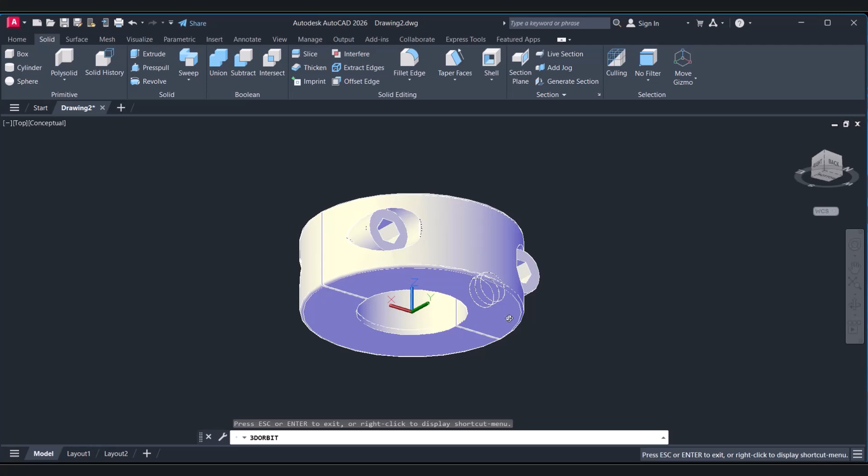In this video, you'll learn how to design a double split shaft clamp in AutoCAD, which consists of 4 components.

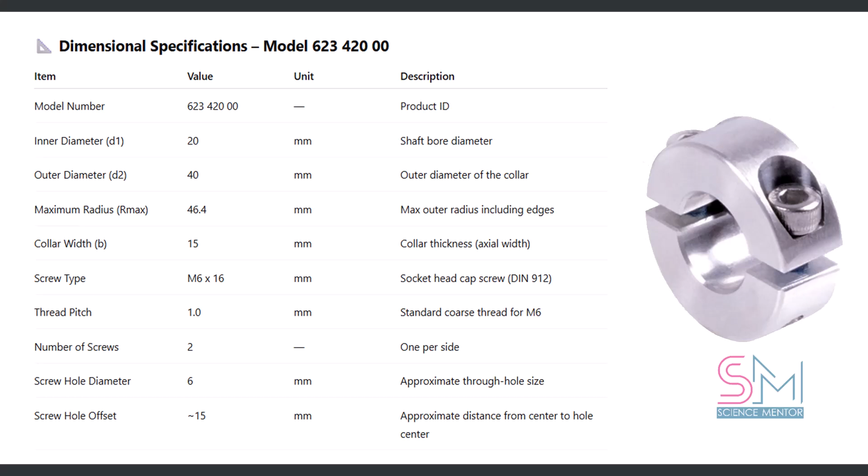Hi again, I'm Milad, and I'm back with another AutoCAD 2026 tutorial. In this video, I'm going to teach you how to model a double split shaft clamp with the specifications shown here. This clamp consists of 4 separate parts.

As always, I start by setting the units using the unit command, since I'm going to work in millimeter dimensions. Using the circle command, I draw 3 circles: the first with a radius of 10 mm, the second with a radius of 20 mm, and the third, just a construction guide, with a radius of 23.2 mm.

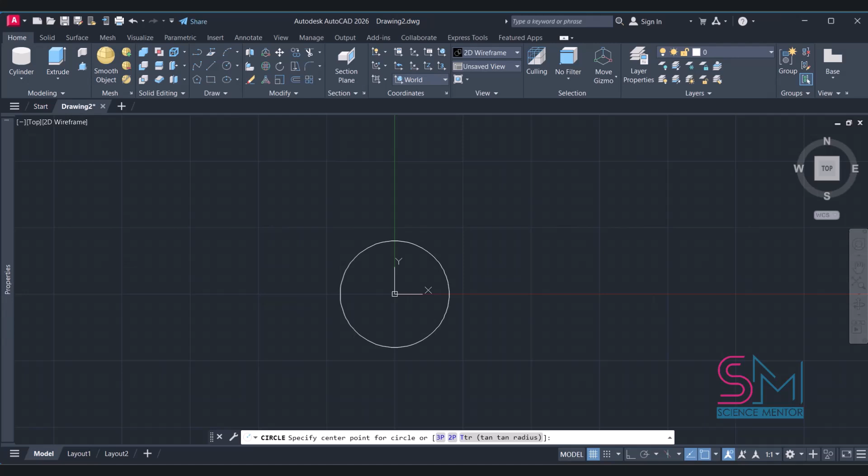The clamp I'm designing is a double split clamp collar, used to hold, position, or secure components on shafts. It's made of 2 halves and tightens around the shaft evenly when screws are applied without causing any damage.

Next, I use the extrude command to extend the circles to a length of 15 mm to form a 3D volume. To subtract the smaller circle from the larger one, I use the subtract command.

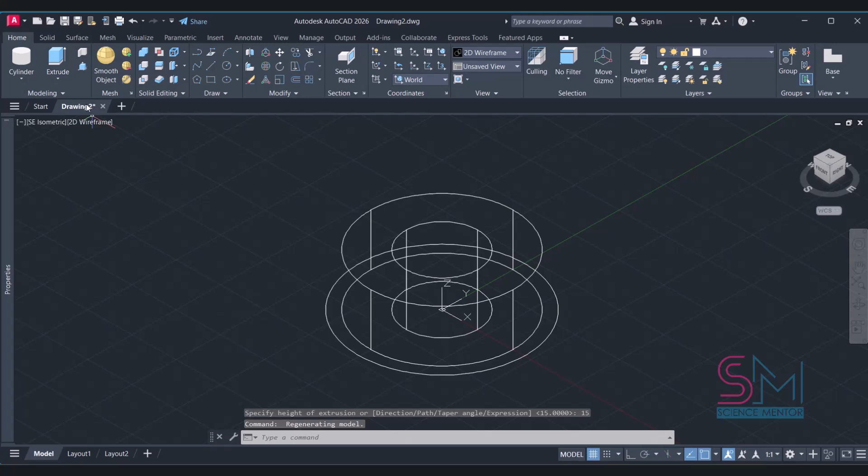Then, I draw a construction line to mark the centre of the screw hole. This line is at a height of 7.5 mm from the base, right at the centre, and located 15 mm from the clamp's centre.

Now it's time to design the screws. First, using the circle command, I draw a circle with a radius of 3 mm and extrude it 21 mm to create a cylinder.

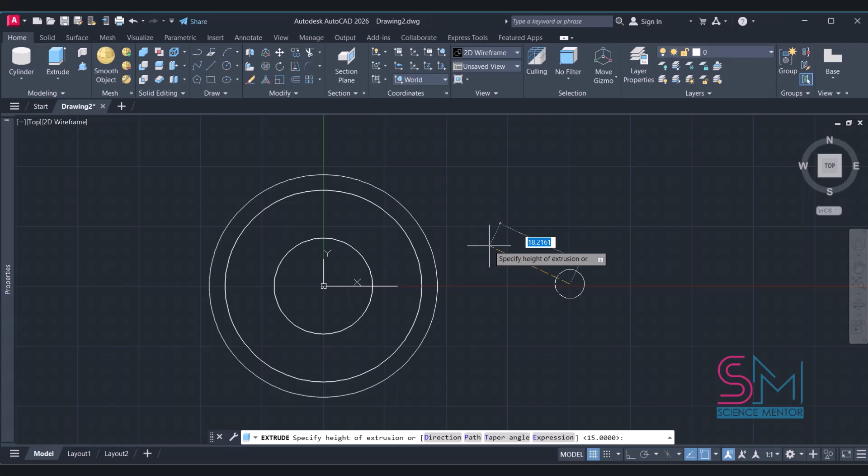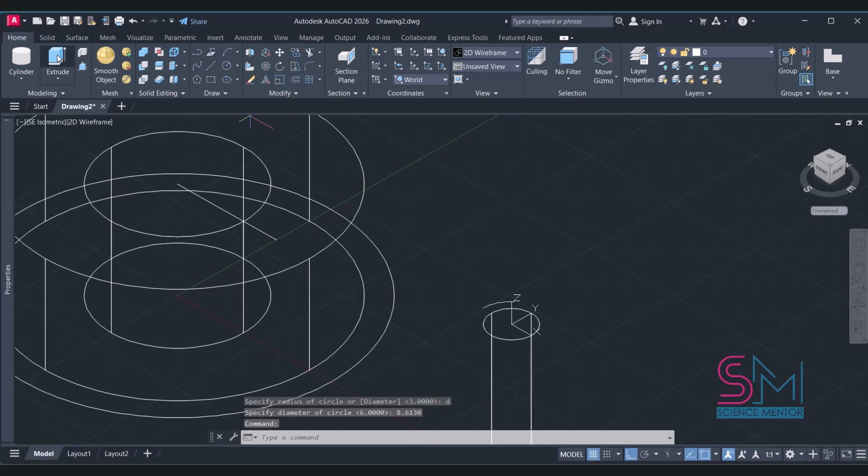I repeat the process for the screw head, but this time the diameter is around 8.613 mm. I extrude this part to a height of 11.9011 mm.

I changed the visual style to conceptual so the view becomes clearer.

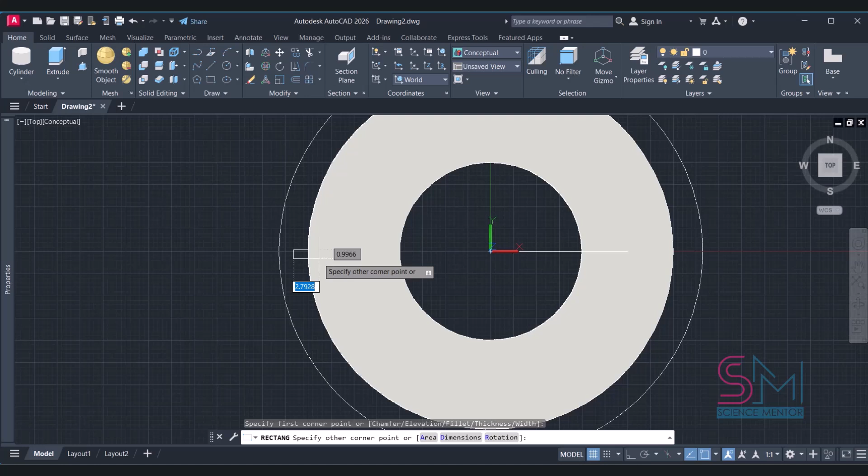Then, using the rectang command, I create a rectangle that's 0.5 mm thick and wider than the clamp diameter. I extrude this rectangle beyond the shaft's height. Using subtract, I can now split the shaft into 2 separate pieces.

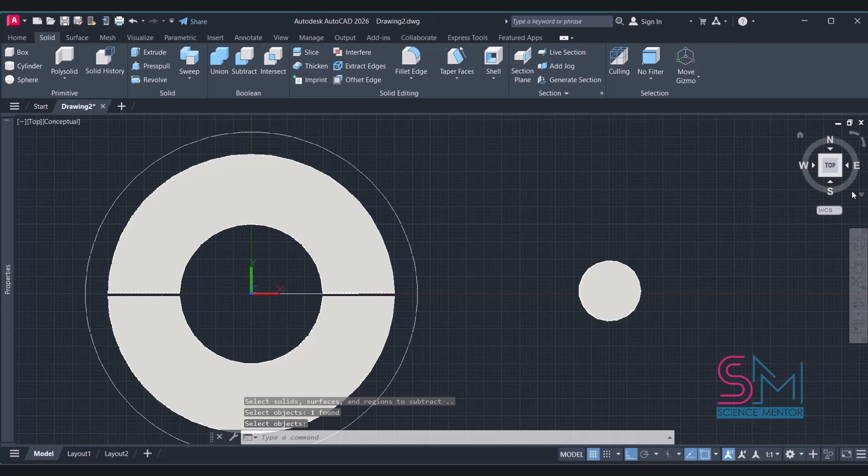I switch the view back to 2D so I can see the details more precisely. Next, I start drawing the thread around the screw using the helix command. This helix has a radius of 3 mm and a pitch of 1 mm.

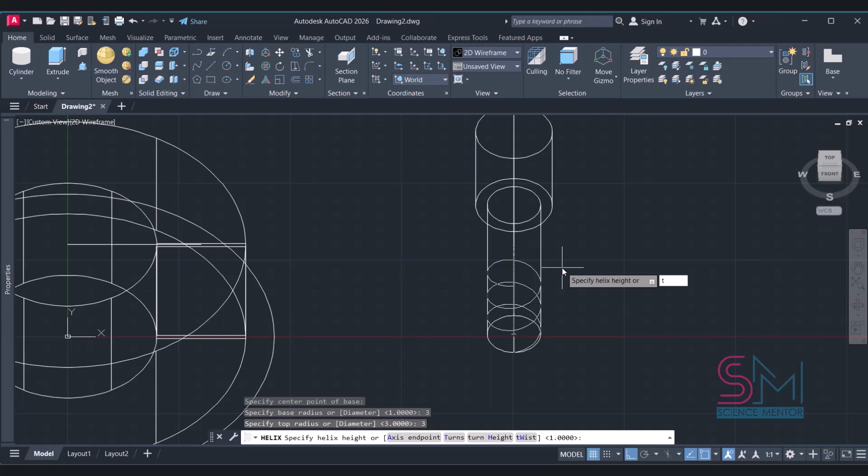The helix command in AutoCAD is used to draw 3D spiral curves like threads or springs. You can adjust base diameter, top diameter, pitch, and height with it.

Now I need to create the profile of the thread. I use the circle command to draw a small circle with a radius of 0.25 mm.

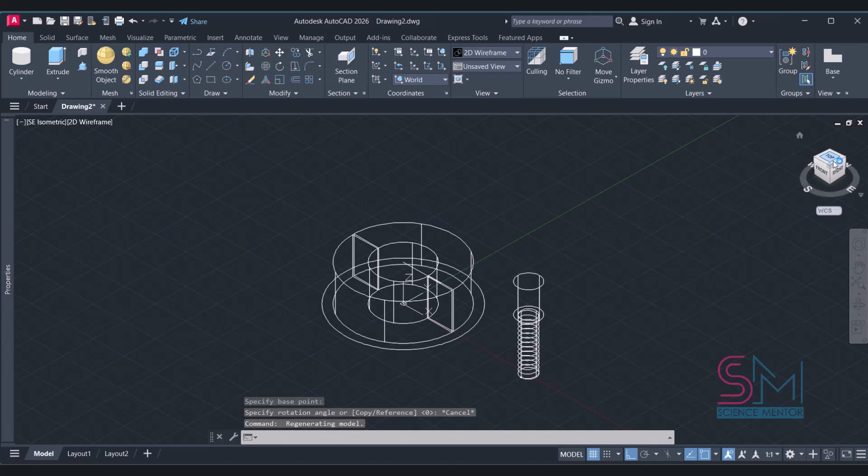This circle needs to be perpendicular to the thread path, which I do using the 3D-rotate command.

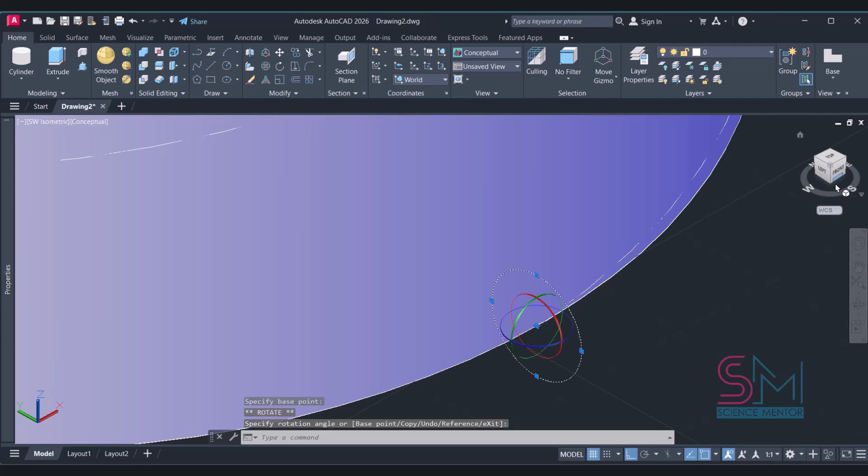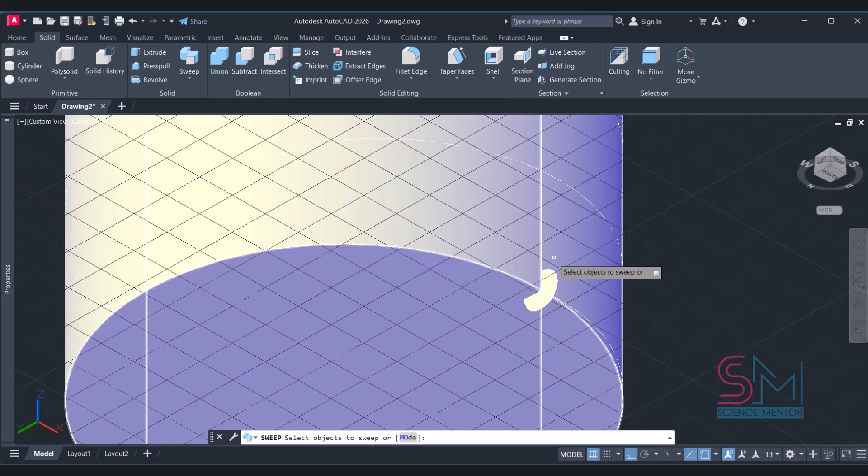I convert the circle into a region using the region command. This command is used to turn closed 2D shapes like polygons or circles into regions that can be calculated and used for 3D operations. Using the sweep command, I extend the drawn circle along the helical path to create the thread.

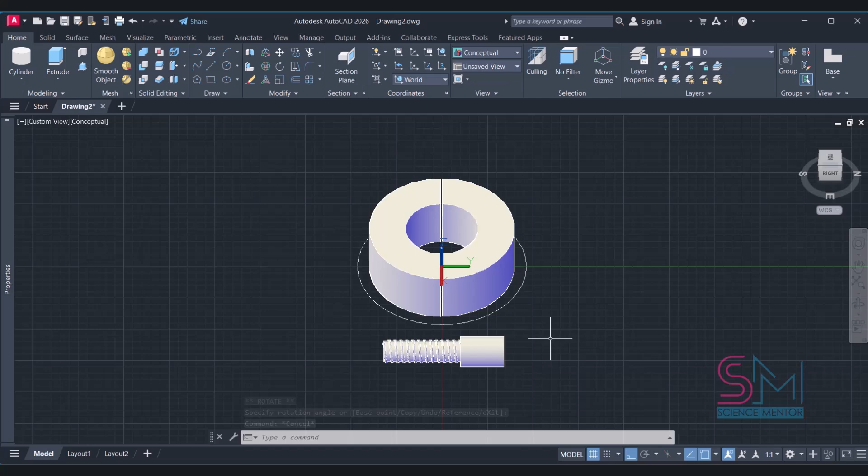Then, I rotate the screw to align it with the clamp. I make a copy of the screw to use as the main one later.

I drag and move the screw into its correct position on the clamp using the Move command.

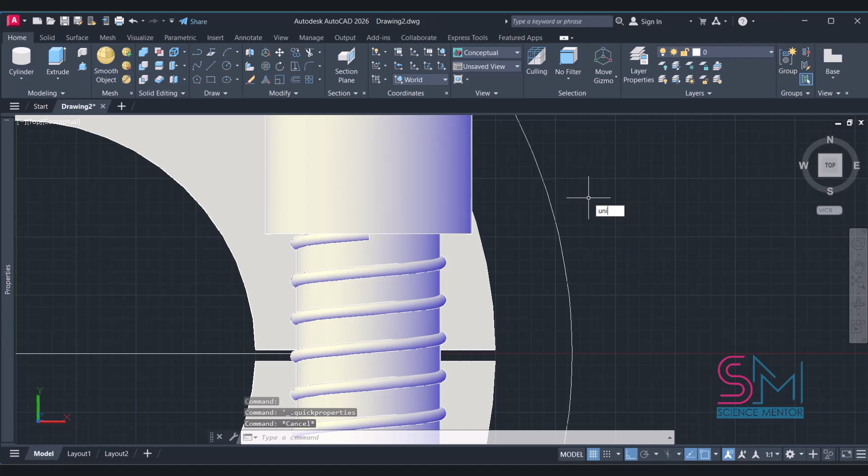Make sure to check the alignment from different angles to get it right. Socket head cap screws have cylindrical heads with internal hex sockets that are tightened using an Allen wrench. These are commonly used in tight spaces and precision applications like assembling mechanical parts and machinery.

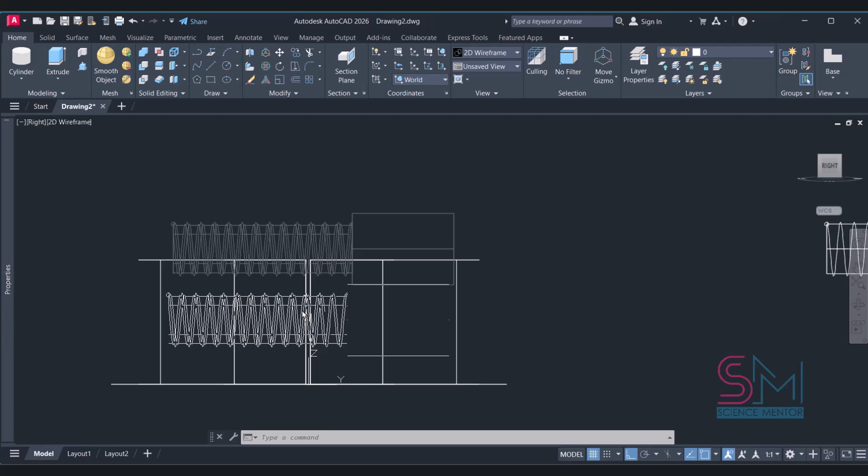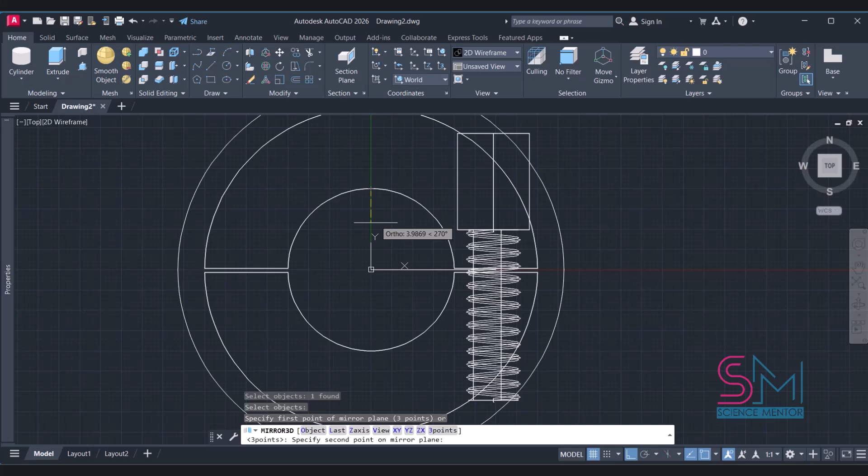To create a mirrored copy of the screw on the other side of the clamp, I use the Mirror 3D command. I select 3 points on the center plane so the screw is mirrored accurately.

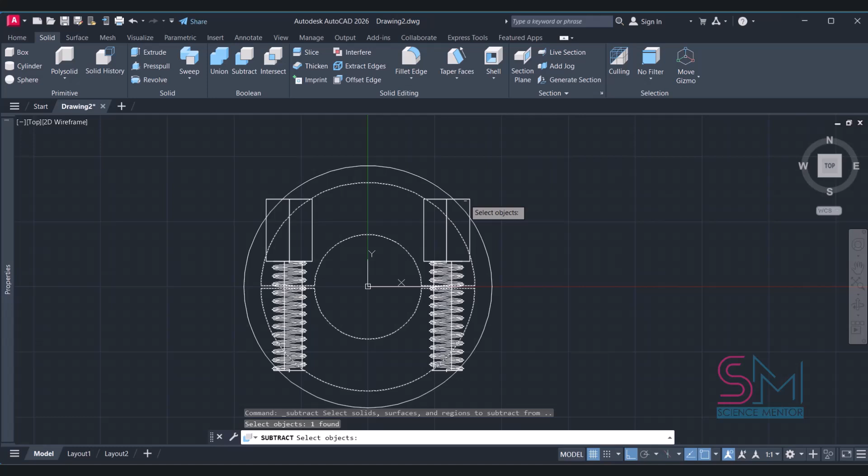Using Subtract, I remove the volume of both screws from the clamp to create the holes and threads. You can view the result from different angles.

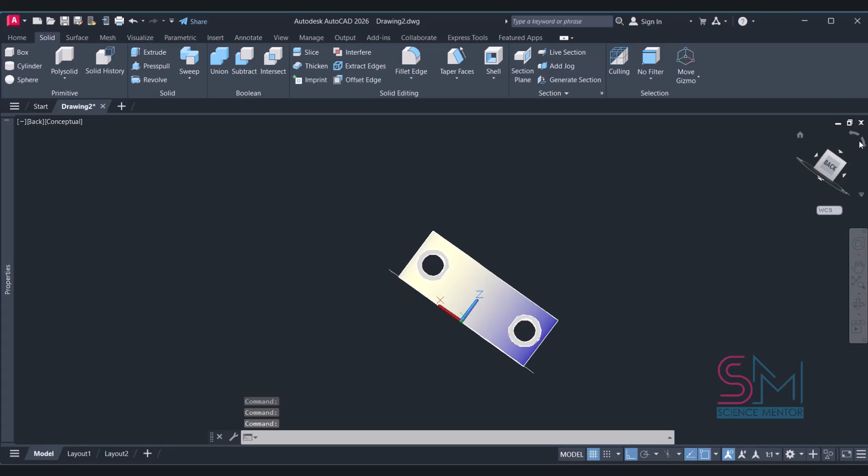Now, back to the screw for some fine-tuning. First, I subtract the helix from the screw body using Subtract to cut the thread into it.

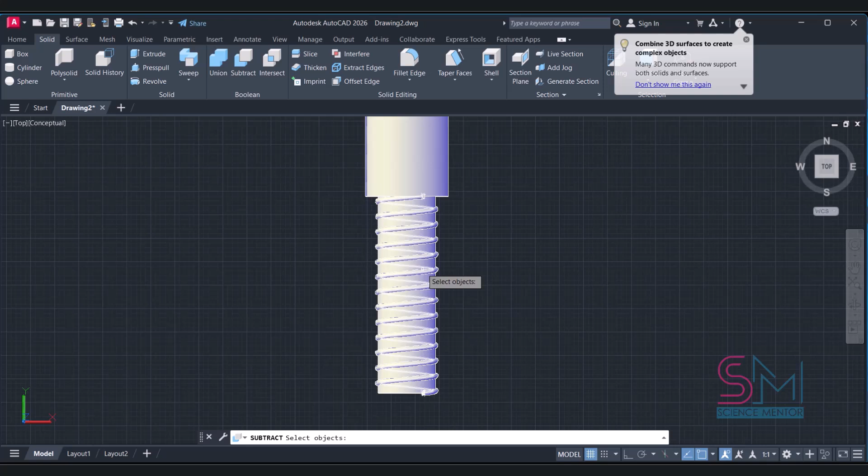The screw is taller than the standard size, so I reduce its height. I do this using a cylinder that's larger than the screw, place it over the top, and subtract it from the screw.

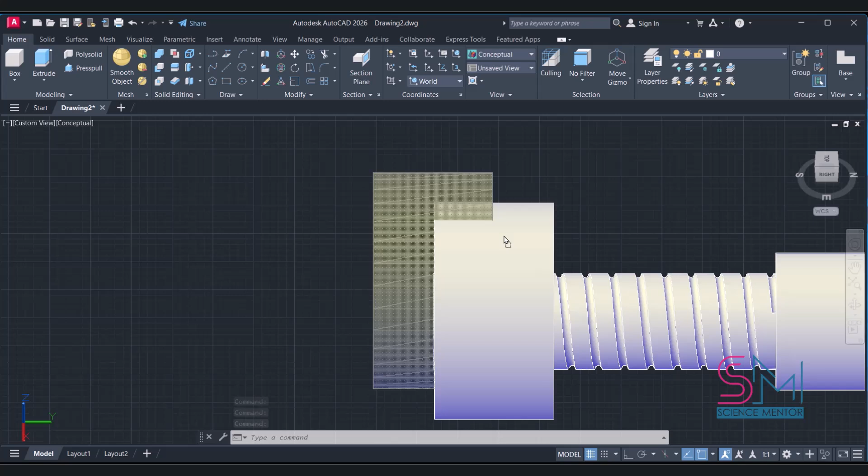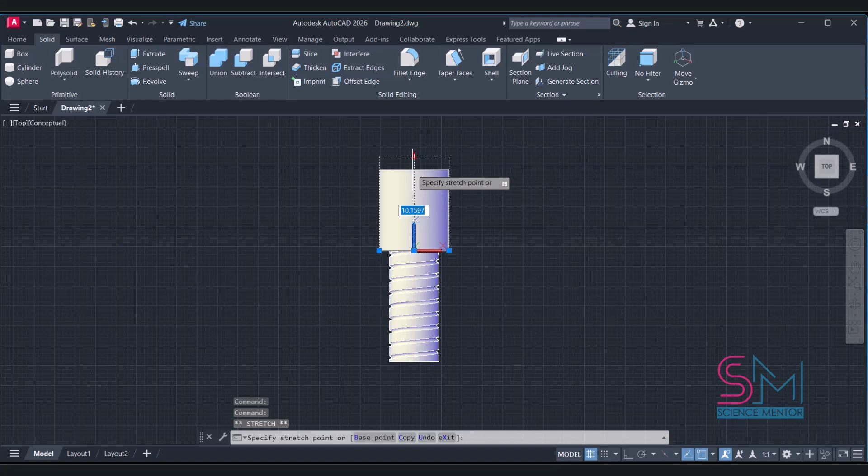The top also needs to be trimmed, so I do that down to a specific height.

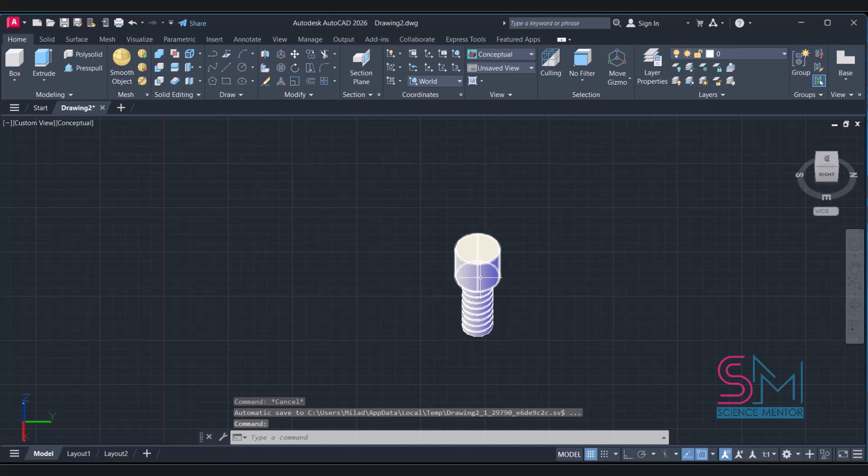Next, I need to create the hex socket where the Allen wrench fits. For this, I use the Polygon command. With the Polygon command, you can easily draw regular shapes like hexagons.

Just type Polygon, hit enter, 6 for the number of sides, then choose whether you want it inscribed in a circle or circumscribed around one, and give the radius. AutoCAD draws it perfectly. This command is very useful for geometric designs and saves a lot of time.

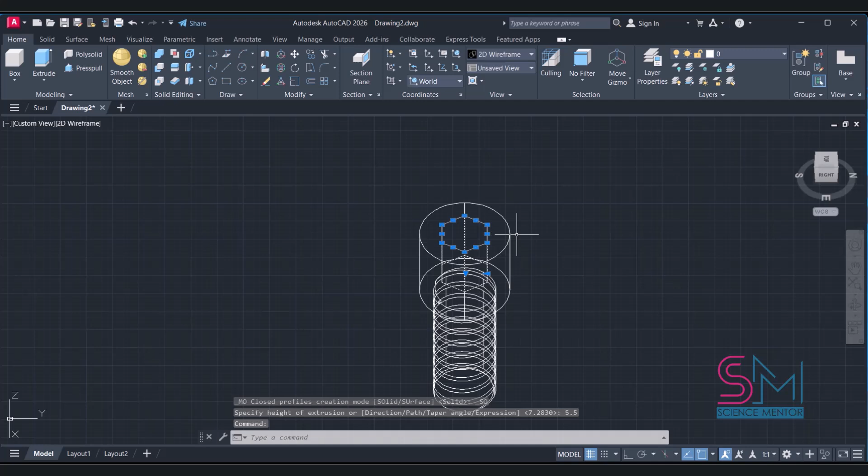I use Extrude to turn the hex shape into a 3D solid. Then I subtract it from the top of the screw to create the hex socket.

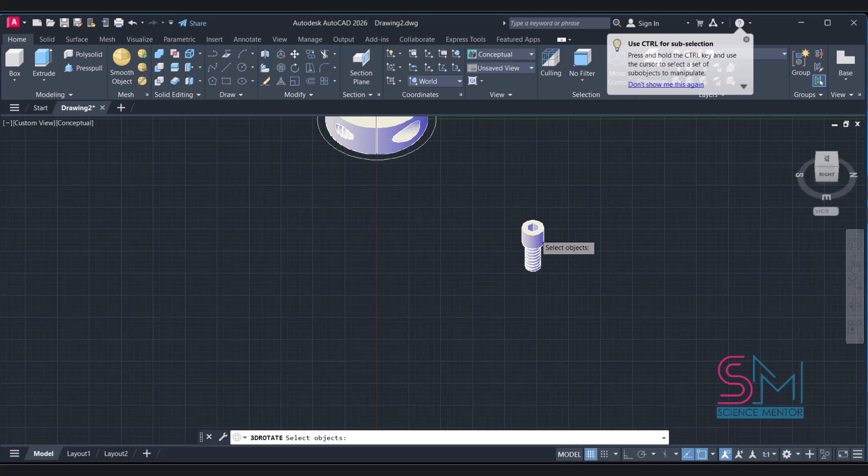Next, I run the Union command to combine all the parts of the screw into one solid body. Now I move the finished screw into its position.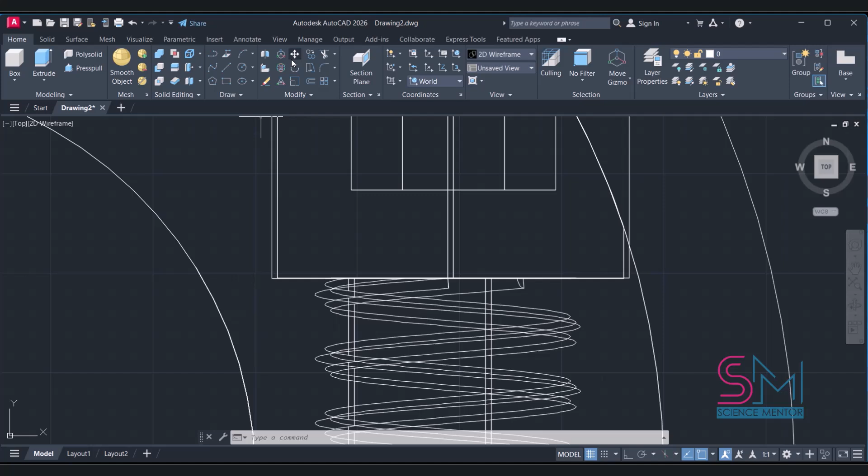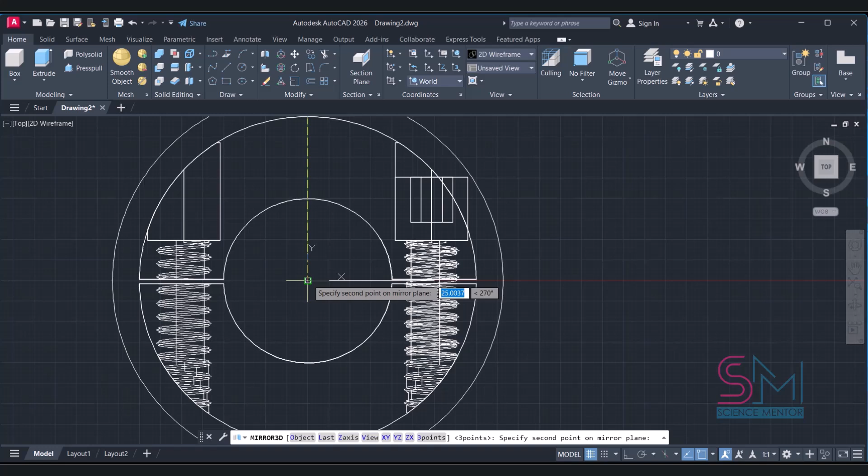To create another screw on the opposite side, I use Mirror 3D again. The Mirror 3D command in AutoCAD lets you mirror 3D objects across a defined plane. Just pick 3 points to define the mirror plane, and AutoCAD reflects the shape accordingly.

It'll also ask if you want to keep or delete the original. It's great for fast and precise 3D modelling. Now I'll round off the edges of the screw slightly using the Fillet Edge command.

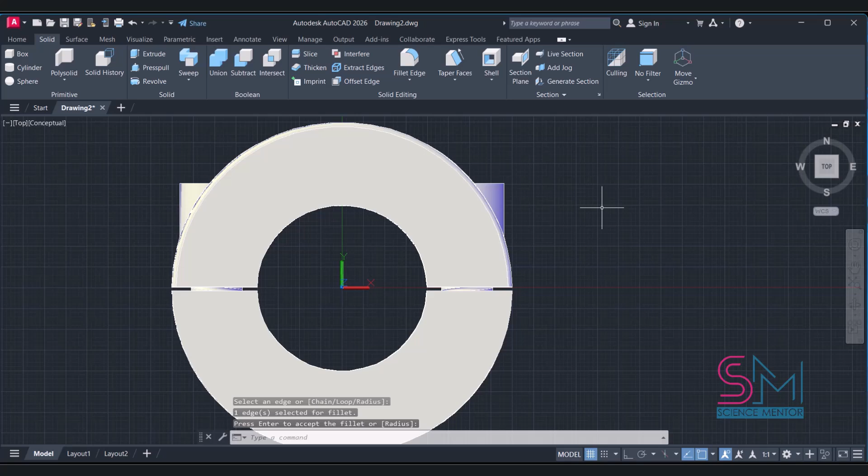And that's it. The clamp is complete and ready for use. Take a look from different angles.